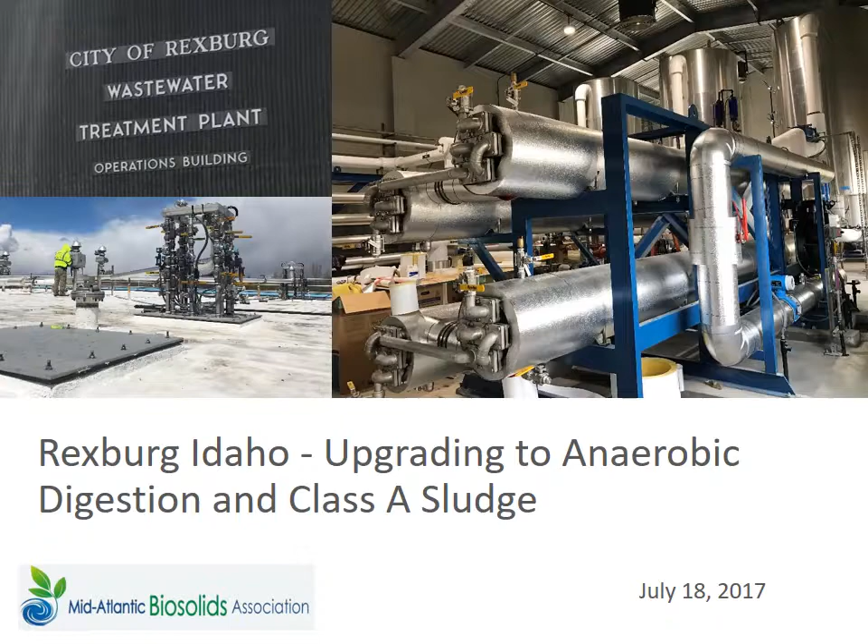It's pretty simple - we went through over the last 3 years working with the city of Rexburg. It's a small facility rated for 9 MGD, currently runs at 5. It's a college town, so they have pretty low flows in the summers as well, so they've got a lot of extra capacity. They were actually looking at converting their basically conventional system with some aerobic basins over to an anaerobic digestion system. So this is basically a retrofit of a small existing facility.

With the conversion, the problem statement here was that they were having a lot of issues with odor. It's actually a heavily Mormon community, so everybody with an opinion, everybody knows each other, so it's very vocal in the sense that people were unhappy with land application. They were having to move further and further away from the city. Also, they're right on the edge of the mountains, so they can't spread their sludge for 6 months out of the year, so they were having storage issues. So a lot of problems they were trying to fix.

Ultimately, they didn't want to put in some complicated tech - they didn't want to put in dryers, they didn't want to bring in additional gas to the site. So we proposed the idea of putting in anaerobic digestion. What we were able to do is convert 4 of their square aerobic basins over to anaerobic digesters. Being that they were having odor complaints with land application, we went with the Class A option with our Monsal 70 pasteurization system. I'll give you the details on how that operates in a moment, and then we'll show you what else we provided on site.

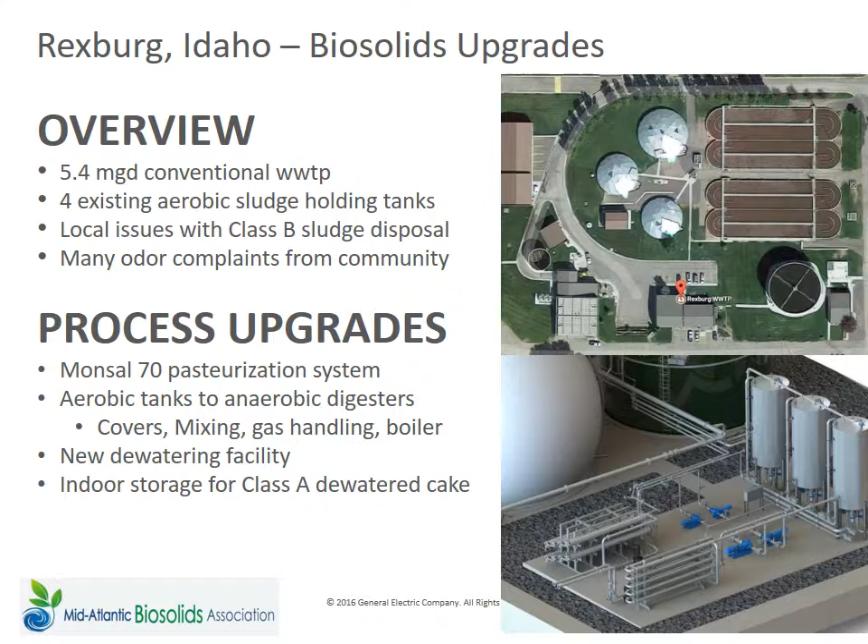Being that we're the last presentation before break, I have a lot of big words, a lot of pictures, so we'll keep this simple for the masses here.

The core technology around what we're doing is our Monsal 70 process. This is a very simple system - it's basically a 3-tank pasteurization system. What we look to do is time and temperature. We're not looking to benefit the digestion process at all - we're simply heating the sludge up above 70 C, about 160 Fahrenheit, for 30 minutes. That's going to give us the time and temperature requirement to meet Class A, so it's just straight pathogen reduction across the board.

This process that we've integrated here, we actually built through the acquisition we made with the Monsal group over in the UK, which they designed for the food waste industry. Over there, all food waste digestion plants require a pasteurizer. You see this in many shapes, especially a lot of food waste plants, a couple in Canada as well. All over the UK and Europe, they do these 3-tank pasteurizers.

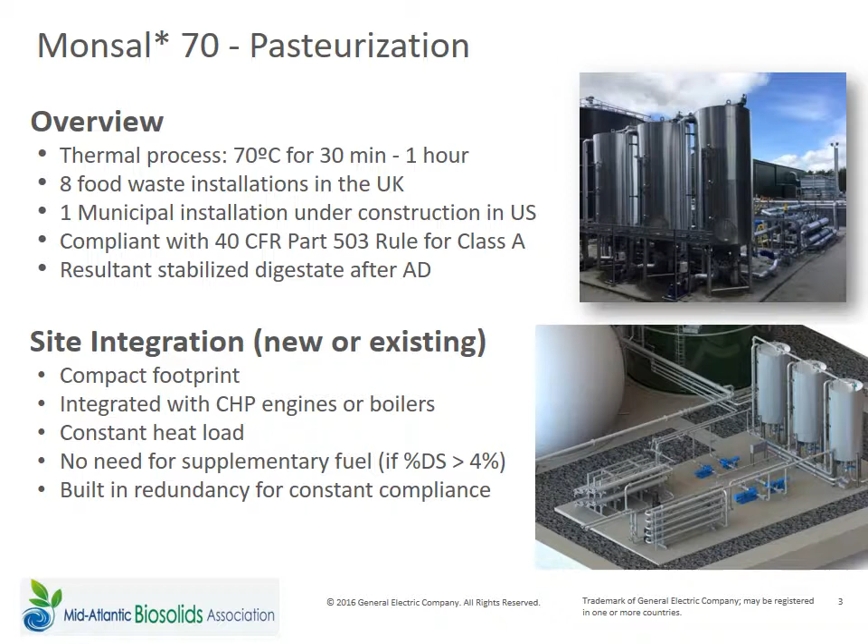Pretty simple technology. The reason we have 3 tanks is it allows us to basically maintain continuous feed to the digesters while holding the batch through the process. So what we're simply doing here is we are preheating the sludge.

In the lower left-hand corner of the screen, you see the undigested sludge, the raw feed coming in. Especially up in Idaho, as low as we actually designed the plant to see, the feed gets as low as 40 degrees Fahrenheit coming in - so very cold feed coming into the plant. We preheat it using the warm pasteurized sludge that's heading to the digesters, and then we bring it into one of the 3 tanks. We actually have a boiler on site, which is going to run on biogas, to basically bring the temperature up above 70 C.

And then once we have multiple temperature transmitters in that unit, once we get it up to temperature, we hold it for the period of time, and once it passes, it heads on to the digester.

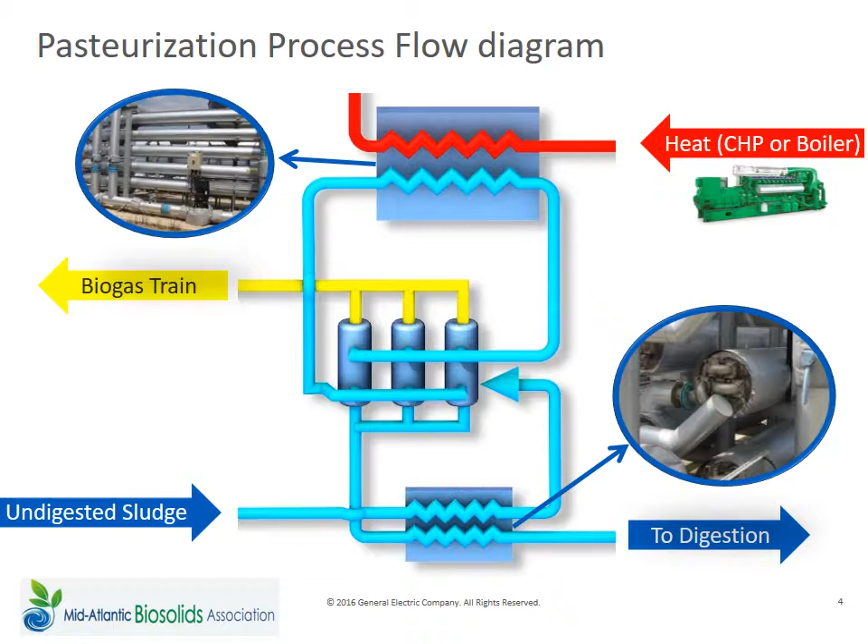We actually have 3 heat exchangers in line. What's shown at the bottom here is not a direct sludge to sludge heat exchanger. We actually go sludge to water to sludge, so we have a medium in the middle there. But pretty simple is what we were going for.

Inside the reactor itself, with the 3 reactors, we have one filling, one holding temperature, and one feeding the digester at a time. That gives us the constant feed. Also, it gives us some redundancy if a batch fails - you can still run in a 2-tank process with a little bit of reduced flow to the digester, but you're not down. So we have some redundancy in the process itself.

I mentioned we have 3 temperature transmitters throughout the tank. We basically bring it in, recycle it through the tank itself, maintain a temperature above 70 C or over 160 Fahrenheit, and then once it hits it, it runs its time. So very simple, very straightforward.

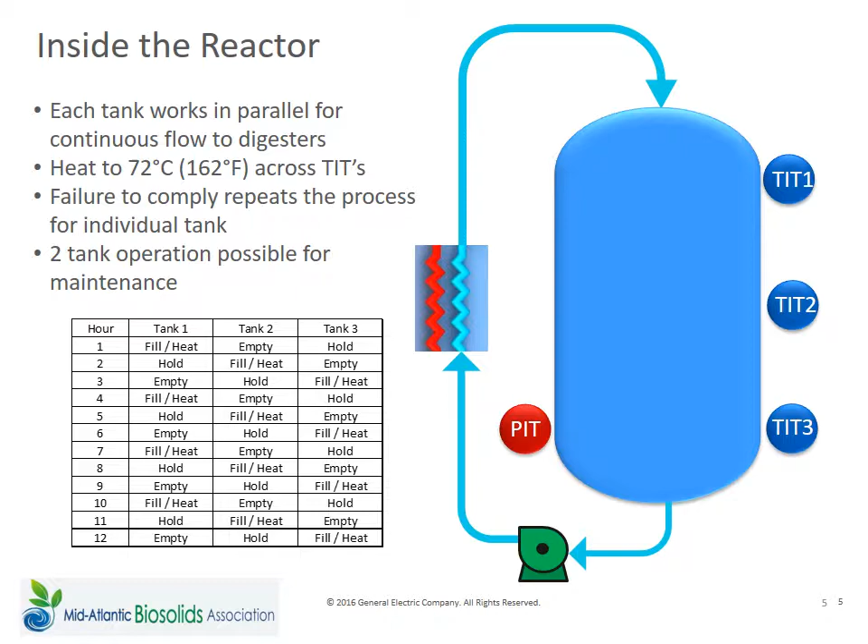Obviously the goal here is to achieve a Class A product. I don't think I need to go into the details of Class A sludge with the group, but what we've done is we've submitted a testing protocol to the Idaho EPA, and they've approved that.

During our performance testing phase, we're going to do batch samples, grab samples every day out of each of the 3 tanks to prove that each tank qualifies, and then we're also going to do one after dewatering, which is where they asked us to do it as well.

So we're basically putting our technology up front of the digesters, and we're going to be testing it throughout with the city. Some people ask why we don't achieve this post-digestion with the solid stream, but since we're providing all the heat here, there's no sense heating it up to run mesophilic digestion and then heating it up again. So the idea is that the energy balance is most effective doing this with all the advanced digestion technologies upstream of the digesters.

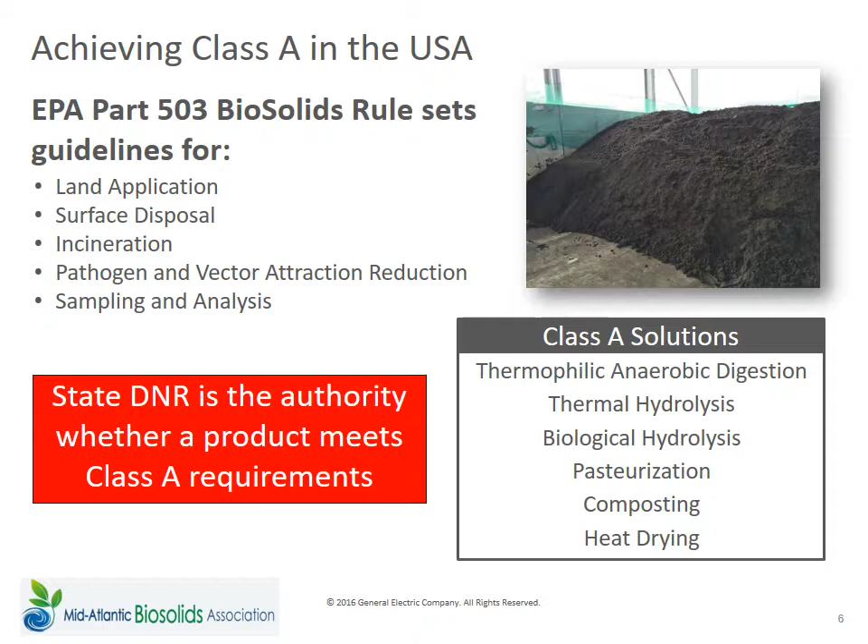All right, a couple pictures for you guys. So there's a picture of the Monsal 70 system up top. You can see the 3 pasteurization tanks up in the back.

This system happens to be inside, so normally they're all outdoors, but with the weather conditions on this project we built a whole new biosolids building. So now the pasteurization system is in there, which you can see - we use multi-pass shell and tube heat exchangers, which you can see the ends of right here across the top.

We also provided, with these tanks, the mixing systems for the digesters themselves. They had 4 concrete square aerobic basins, so with the engineer, they put new covers on those tanks and sealed them up.

Eventually, that was one of the big delays - they had issues getting the covers to seal. As you can see, they put the covers across, these fiberglass covers, and actually the manways were what never sealed up. It took a long time to fix.

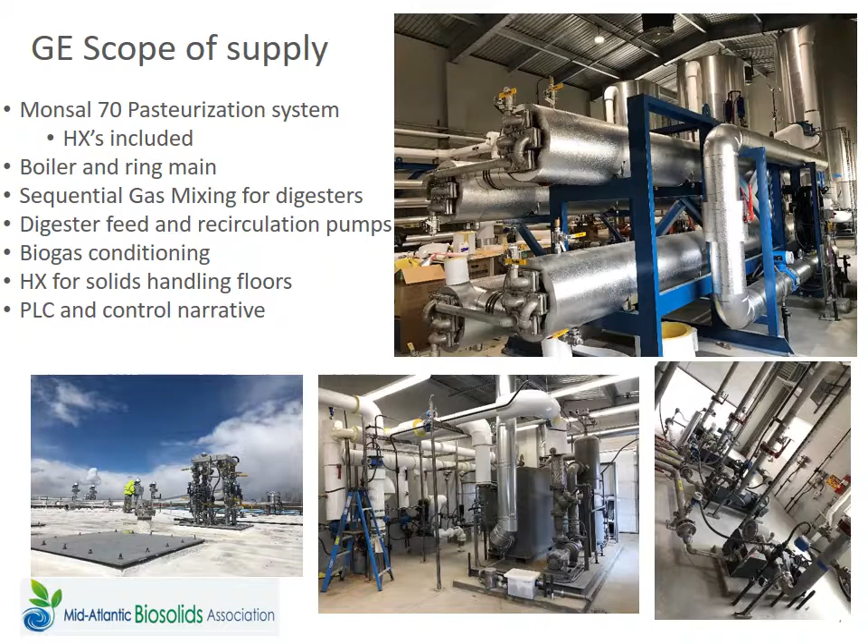One of the main benefits of the installation here - I don't have any operating data for you guys. Unfortunately, when I agreed to do this, we've had 4 months worth of delays on startup. Big one around the gas, the covers sealing and leaking gas. They had a lot of issues with that.

We've been seeding the digesters for 2 weeks now, so the first digester will be fully up and running in about 2 weeks. I thought we were going to be 3 months into this, but there was a longer winter than expected out in the west this year, which delayed everything. So unfortunately, I got a lot of shiny pictures - that's why everything's so clean, because we haven't run sludge.

Well, everything's been commissioned on clean water, but not really running sludge through it yet, so it still looks nice and shiny. One of the interesting features of what they're doing here is they actually built an indoor sludge holding facility with 6 months storage capacity for their dewatered cake.

So the boiler we have is actually well oversized to handle all the biogas and potentially some natural gas as well, and they actually built in heated floors into the system as well. So in the biosolids building, they're going to dewater the cake, store it over the winter months, and have heated flooring to hopefully further dry the system, with odor control and whatnot as well.

So that's going to help them. They're going to have a Class A product that hopefully is going to be 40 to 50% dry after a few months, and then they're going to be able to land apply that locally starting. This will be fully commissioned by November, so they can store sludge all winter, and then dispose of it in the spring when it starts to thaw out.